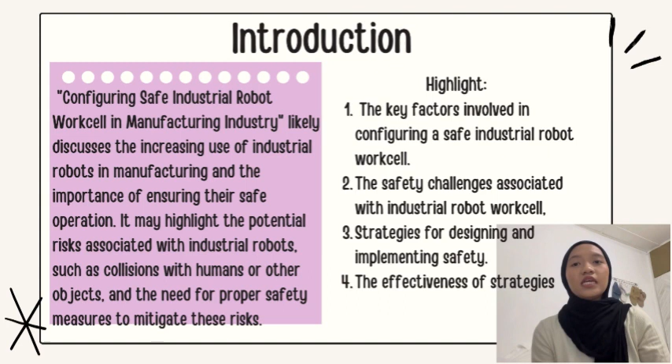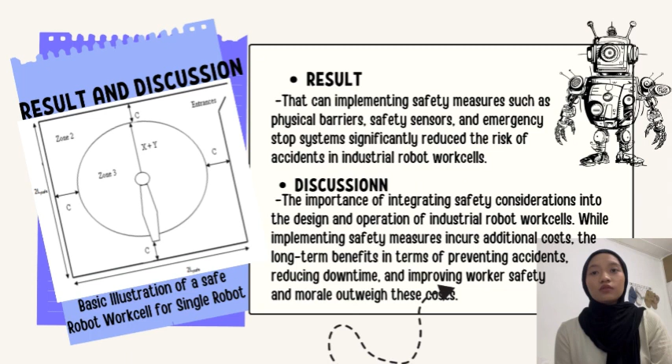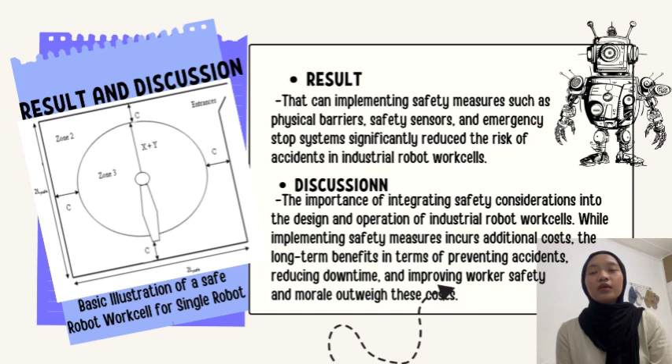So for this discussion, the results highlight the importance of integrating safety considerations into the design and operation of industrial robot work cells. While implementing safety measures incurs additional costs, the long-term benefits in terms of preventing accidents, reducing downtime, and improving worker safety and morale outweigh these costs. The findings emphasize the need for manufacturers to prioritize safety and invest in appropriate safety measures to protect both workers and equipment. To ensure the safety and efficiency of industrial robot work cells, immediate action is needed to implement robot safety measures and compliance practices.

So first is implementation of safety measures. Manufacturers should prioritize the implementation of safety measures such as physical barriers and safety sensors in industrial robot work cells to reduce the risk of accidents. The second is compliance with standards. Adherence to safety standards and regulations is essential to ensure the safe operation of industrial robot work cells and protect workers from harm. Third, investment in safety. Companies should invest in appropriate safety equipment and training to create a safe working environment for employees.

Fourth, continuous improvement. There is a need for continuous improvement in safety practices and technologies to address emerging risks in the industrial environment. Last but not least is research and development. Further research is needed to develop innovative safety solutions and improve the design of industrial robot work cells to enhance safety and efficiency. So the next slide is the references that I referred to for my journal research.

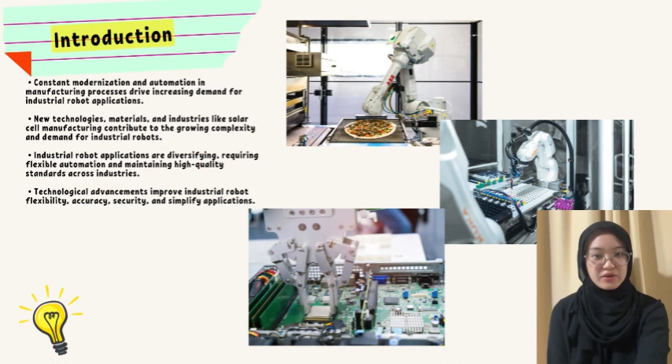This analysis focuses on trends and applications across industries and countries to identify areas of high robot utilization and industrial development. From the data provided, it's clear that Asia and Australia lead the world in industrial robot applications, both annually and in total. In 2010, Asia alone accounted for 59% of the annual industrial robot applications worldwide,

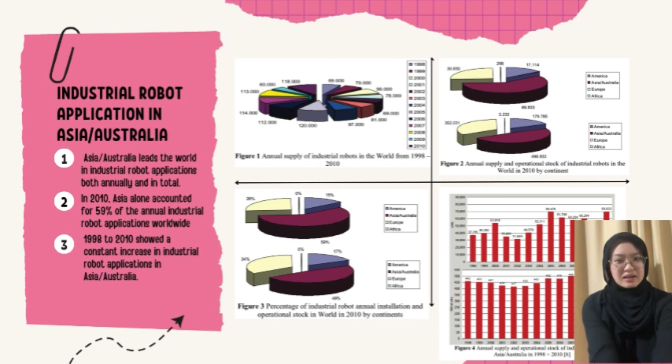with a total of 498,933 units applied. However, when looking at the total level, Asia and Australia represent 49% of the total industrial robot applications globally. The trend from 1998 to 2010 showed a constant increase in industrial robot application in Asia and Australia, with a slight decline in the last 3 years, particularly affected by the financial crisis in 2009.

From 2008 to 2010, industrial robot applications in various manufacturing processes in Asia and Australia increased. In 2010, there were 69,833 new industrial robots applied, which is 130% higher than in 2009. Handling operations accounted for 41%, welding for 30%, automobile industry for 21%, electro and electronic industry for 37%, and chemical industry for 8% of the total application at the annual level.

The total number of industrial robots applied in 2010 remained slightly lower compared to 2009. In terms of industrial branches, the automobile industry used 32%, electronic industry 23%, and chemical industry 10% of industrial robots. The trend over the last 3 years shows a sudden fall in application in 2009 due to the financial crisis. Overall, the total industrial robots application trend in the last 3 years in Asia shows a slight decrease.

The analysis of industrial robot applications in countries of Asia and Australia from 2008 to 2010: the Republic of Korea led in 2010 with 23,508 units, followed by Japan and China. Other countries also had significant applications.

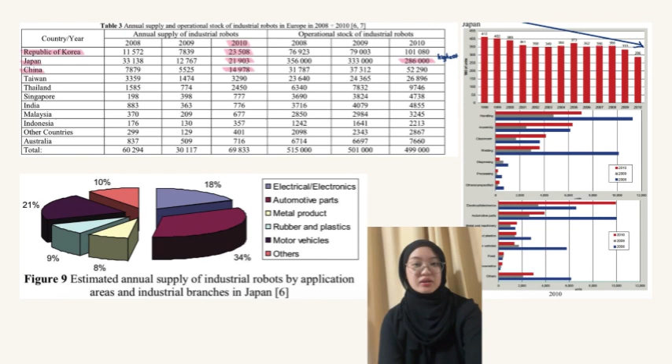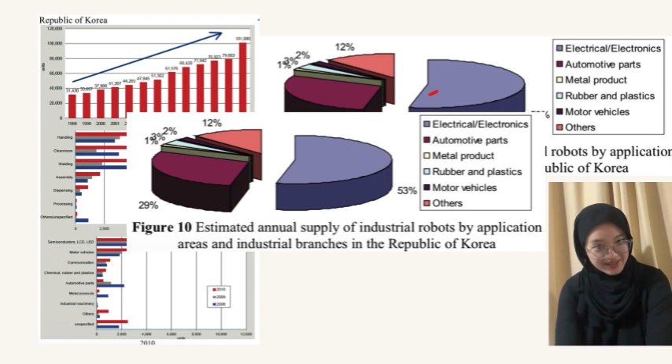In Japan, the total number of industrial robots decreased over the last 3 years, with the automobile industry being the largest user. The Republic of Korea saw an increasing trend in industrial robot applications, particularly in the electro industry. China also experienced growth mainly in the automobile and metal industry. Taiwan showed an increase in industrial robot applications across various processes. Overall, these countries in Asia and Australia are heavily investing in industrial automation to stay competitive in global markets.

So this slide is about results and discussion that I managed to achieve in the journal. The analysis shows that Asia and Australia is leading in using industrial robots worldwide. There was a steady increase in robot use from 1998 to 2010, with a slight dip in 2009 but a big jump in 2010. Key industries like handling, welding, automobile, and electronics are driving this trend.

In 2010, South Korea used the most robots, followed by Japan and China. China stood out for tripling its robot use in just 1 year. These trends mean more efficient production, better quality products, and lower labor costs. It's especially important for staying competitive in global markets. As technology advances, countries need to keep up with automation to stay ahead in manufacturing.

In conclusion, the data emphasizes Asia and Australia's prominent position as a global leader in industrial robot adoption, driven by consistently high utilization rates across diverse industries. Despite encountering challenges such as the 2009 financial crisis, the region has demonstrated resilience, exhibiting continuous growth in industrial robot application. These trends reflect the robustness of the manufacturing sector in Asia and Australia.

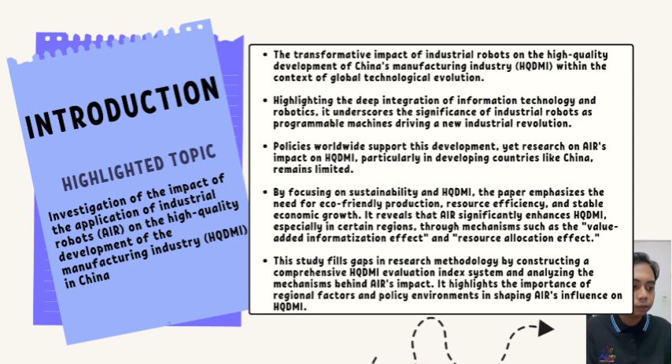Analysis of the impact mechanism revealed two main effects of industrial robots on HQDMI: the value-added informatization effect and the resource allocation effect. The former refers to how it enhances HQDMI by improving regional informatization levels, while the latter pertains to how it optimizes resource allocation, leading to improved manufacturing outcome.